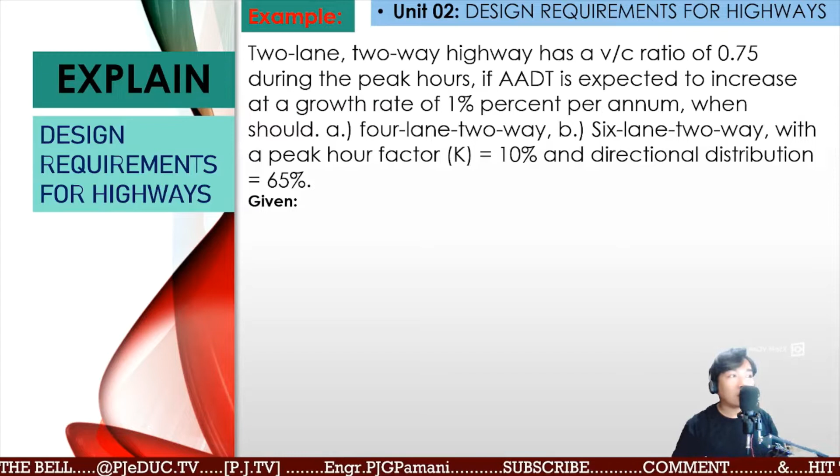Growth rate. So, meron tayong interest. Pinag-uusapan natin yung future result, present, and future. So, meron tayong growth rate of 1% per year. When should we then construct a 4-lane two-way, 6-lane two-way with a peak hour factor K of 10% and a directional distribution factor of 65%?

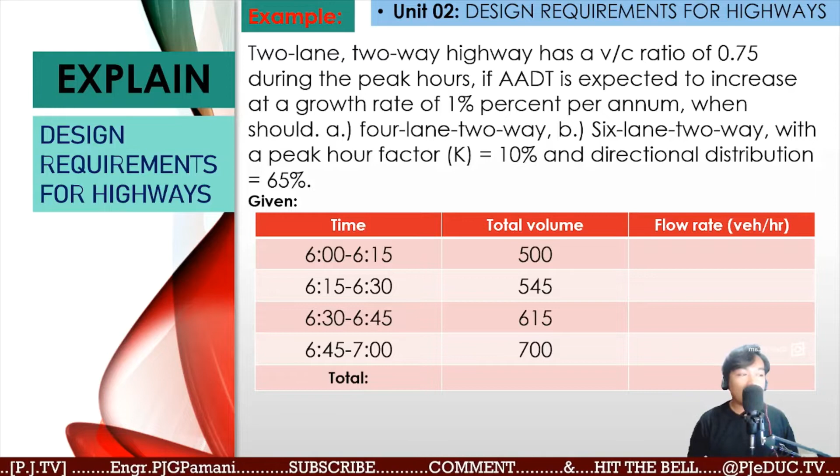So, starting 6 a.m. to 6:15, nakikita nyo sa Baguio, sa may overpass, may tao dun sa taas nagbibilang. So, at 6 to 6:15, meron siyang nabilang na 500 vehicles. 6:15 to 6:30, we have 545. 6:30 to 6:45, we have 615. 6:45 to 7 a.m., we have 700 vehicles.

Ngayon, kukunin natin yung flow rate, which is the peak hour. Ano ngayon yung value natin sa flow rate or vehicle per hour? Number of vehicles per hour passing that particular lane, which is 2-lane, 2-way currently. So, flow rate is basically the total number of vehicles counted divided by the time counted. So, 15 minutes, gawin natin per hour. So, 500 over 15 over 60. That is 2,000 vehicles per hour.

At 6:15 to 6:30, that is 2,180 vehicles per hour. At 6:30 to 6:45, that is 2,460 vehicles per hour. Total vehicles identified within an hour is 2,360 vehicles. The flow rate within an hour was identified at peak at 2,800 vehicles. So, at 6:45 to 7 a.m., eto ngayon yung time kung saan marami yung ating sasakyan. Maximum vehicles counted within an hour is 2,360. Maximum rate at which vehicles pass through that lane is 2,800 vehicles per hour.

This is just a side computation. For us to compute the peak hour factor of a particular lane currently, that is basically the total volume within an hour counted divided by 4 times the volume on peak hour. So, actual total number of vehicles, 2,360 divided by 4 times 2,800 gives us 0.21 or 21%. The peak hour factor on the current 2-lane, 2-way. Pero given sa ating problem is 10%, yan muna ang ating susundin. Pero based on initial count, meron tayong 21%. This is just a minor example.

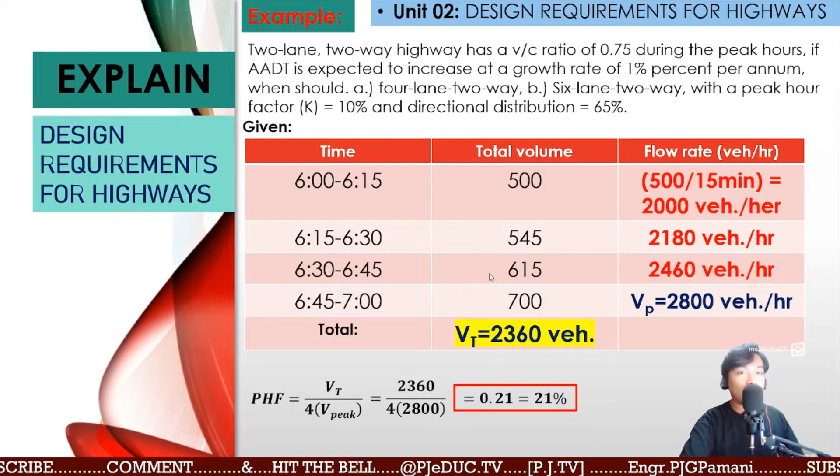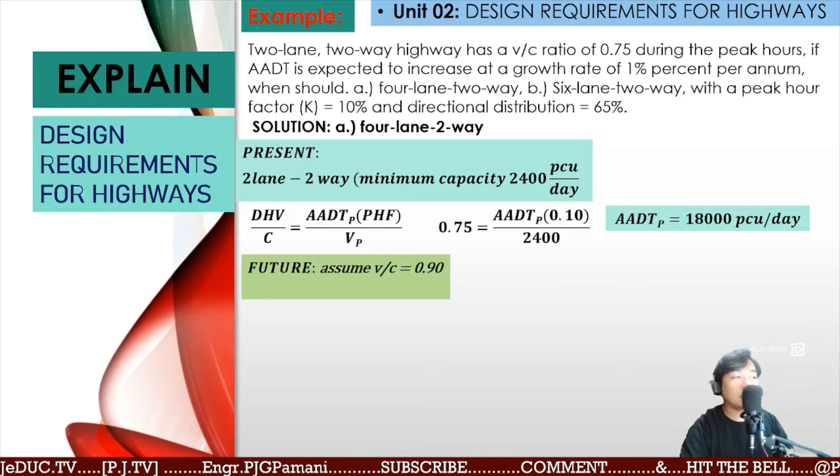Then, DHV is AADT times K. So K natin is also PHF. AADT, ano yung average annual daily traffic natin at present? Two-lane, two-way: 2,400 capacity, volume capacity ratio of 0.75, factor K given as 10%. So at present, the average annual daily traffic is 18,000 passenger car units per day. Ito na ngayon sino-service nating sasakyan. Sa future, assume natin volume capacity ratio at 90% para ma-maximize natin yung change.

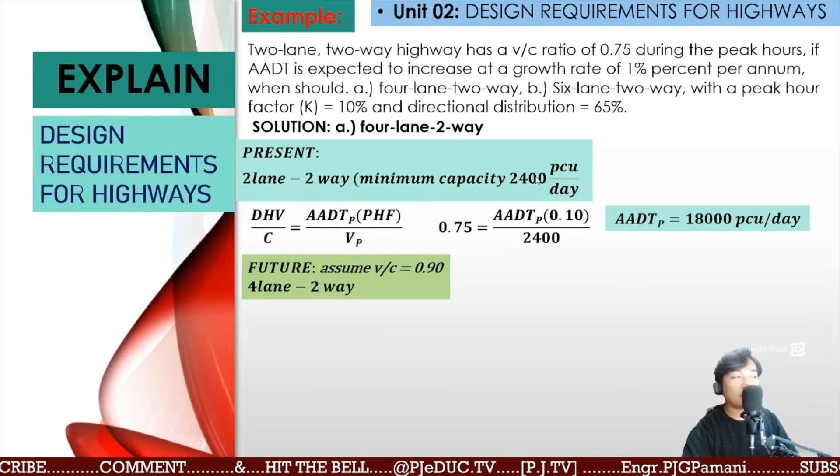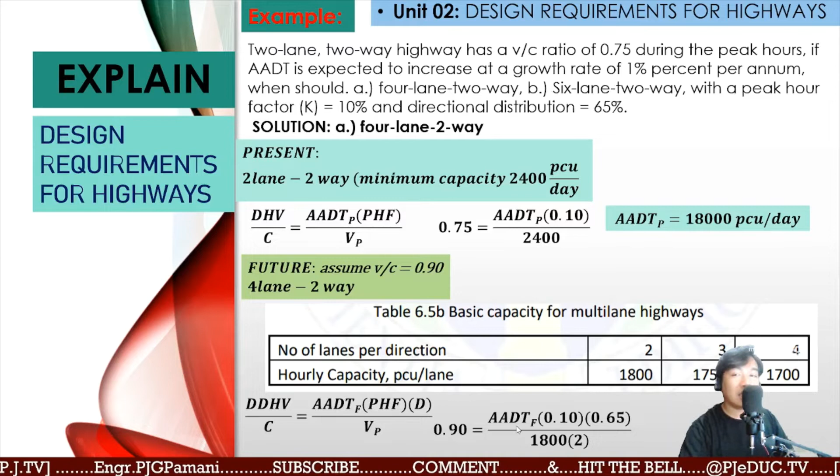So, for 4-lane two-way, ilan ngayon yung AADT natin? More than 2,400 na dapat yung capacity natin. Meron na tayong PHF at distribution factor. Based on table 6.5, basic capacity for multi-lane highway, 4-lane two-way is 2 lanes per direction, so 1,800 times 2. Volume capacity ratio at 0.90. Multi-lane tayo, so gagamitin natin DDHV = AADT times K times D: 0.9, AADT in the future, 0.10 peak hour factor, 0.65 directional, 1,800 times 2. Then the future AADT required is 49,846.153 passenger car units per day.

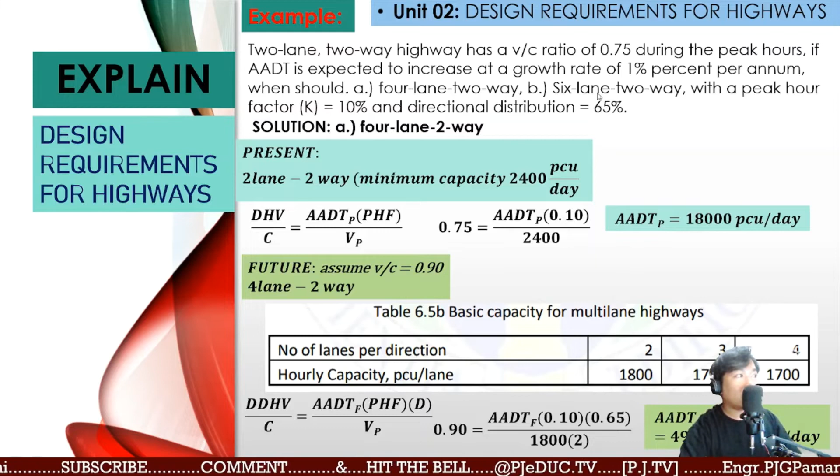So, present and future, with a growth rate of 1%. Remember your economics: future cost and present cost. Present AADT is 18,000, future AADT is 49,846.154. At a growth rate of 1%, kailan tayo magdadagdag ng kalsada into a 4-lane two-way? Currently, we have 2-lane two-way. After 103 years, using this formula, we will have to provide roadway expansion to a 4-lane two-way. Tagal no? After 100 years, eto na yung expansion na kailangan natin.

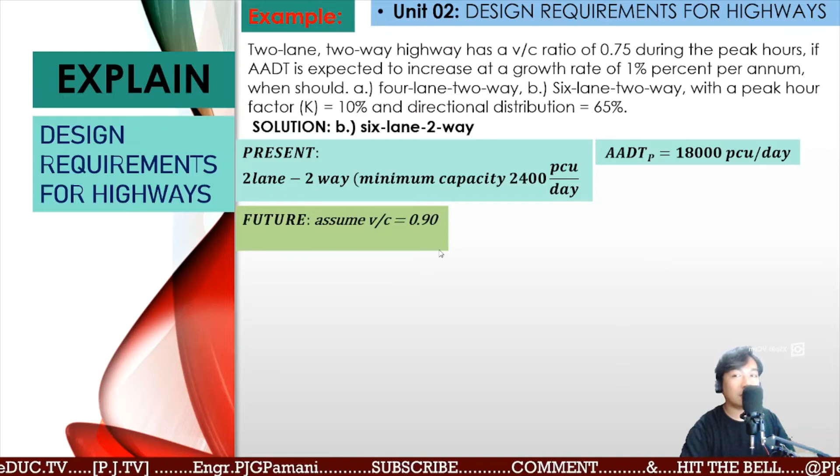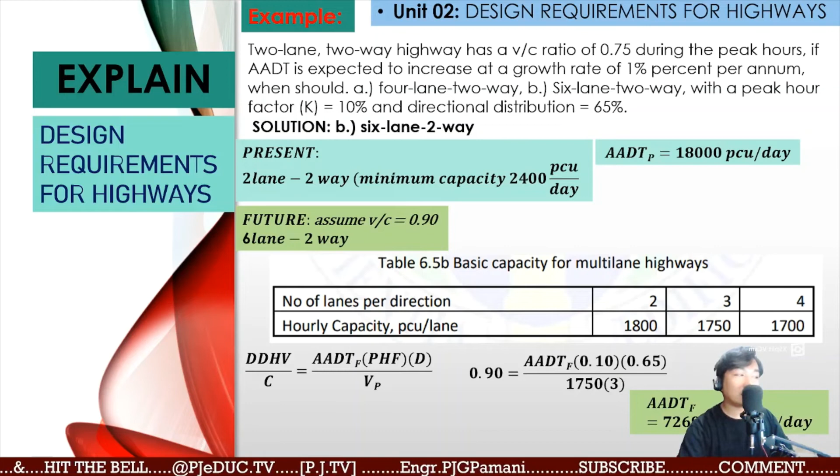But how about for a 6-lane two-way? At present, we computed 18,000 PCU per day. For the future, assume ulit volume capacity ratio of 0.90. 6-lane two-way, refer tayo ulit sa multi-lane table 6.5b; 2 times 3 is 6 lanes, so 1,750 times 3. DDHV = AADT times K times D: 0.90, future AADT, 0.10, 0.65, 1,750 times 3, gives a future AADT of 72,692.308 PCU per day. Gaano katagal bago natin i-increase ang highway into a 6-lane?

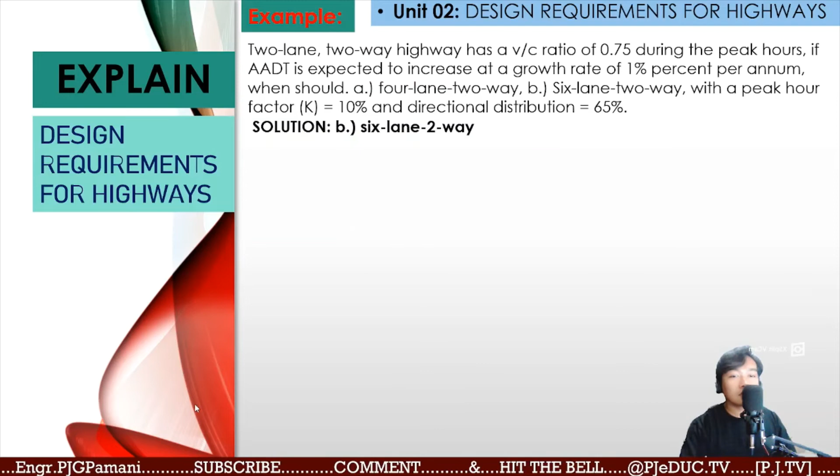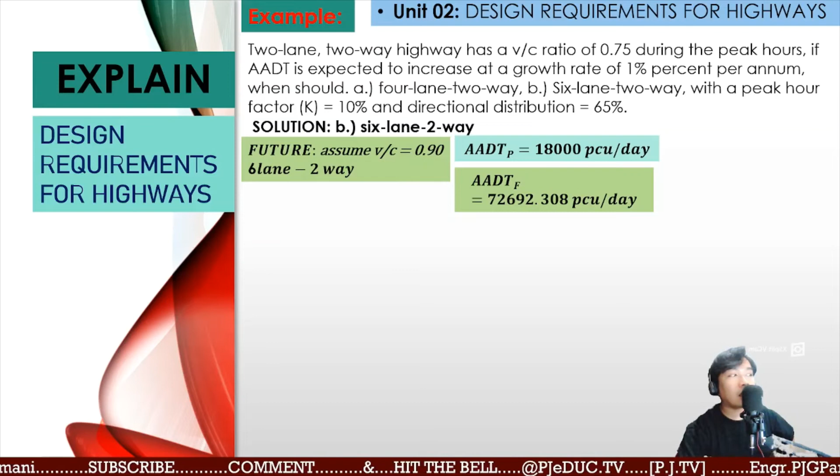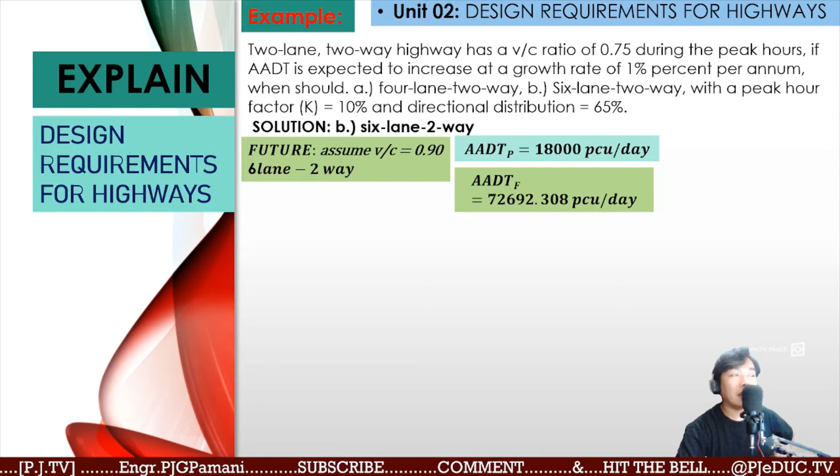Currently, we have 18,000 PCU per day accommodated by a two-lane two-way highway. In the future, kailan natin kakailanganin ng 6-lane two-way that will supply 72,692.308 PCU per day? Using future and present computation at a growth rate of 1%, we get N, the years at which we need to expand into a 6-lane two-way design: after 141 years. Napaka-unrealistic, pero most likely ganyan ang computation.

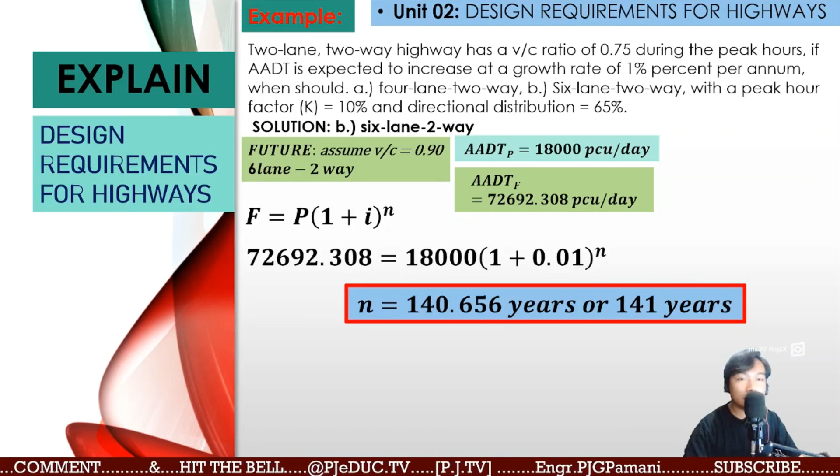Then, some other factors may be considered later on, conservative design factors when it comes to weather, economy, GDP, budget, and so forth. Then, another example will be on the design requirements of highway.